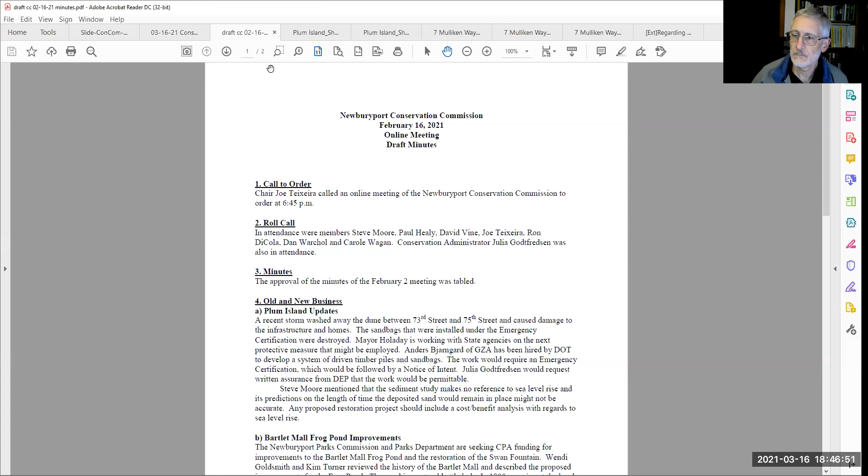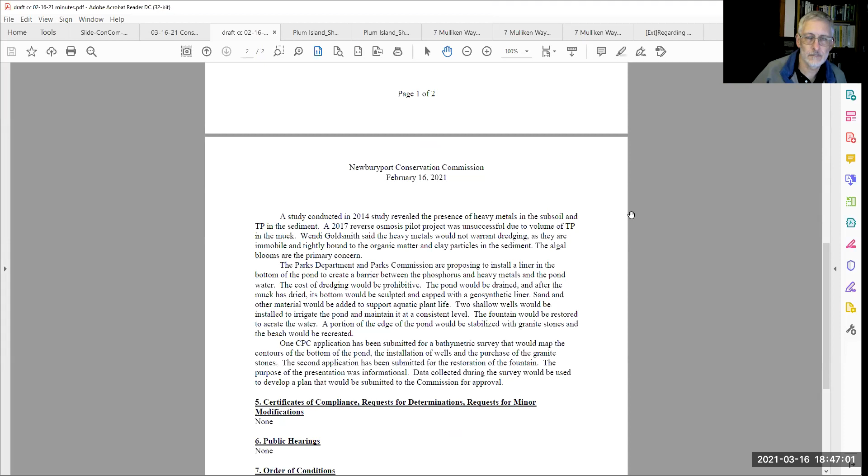All right, next item are the February 16th, 2021 meeting minutes. Any comments, changes, etc.? Get a motion? Assuming there's none. Second. All right, Paul Healy, yes. Steve Moore, yes. Dan Warchol, yes. David Vine, yes. Ron DiCola, yes. Carole Wagan, yes. And I vote yes. Maybe I'll remember to say roll call vote next time.

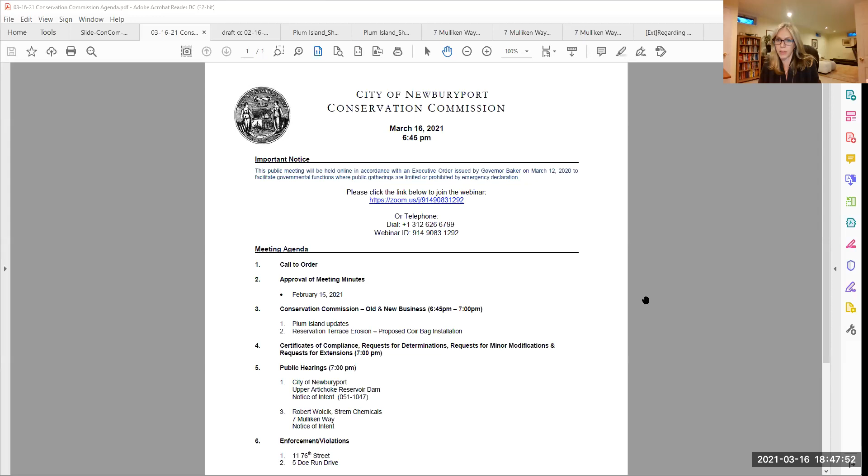All righty, next item are the, where am I looking at this, the Plum Island updates, which I think is the Reservation Terrace erosion presentation. Yes, so we have with us tonight Mayor Holaday and Anders Bjarngard from GZA, who will be available. I believe Councilor Zaid is here too. Mayor Holaday and Anders were prepared to give a short overview of the proposed project out on Reservation Terrace.

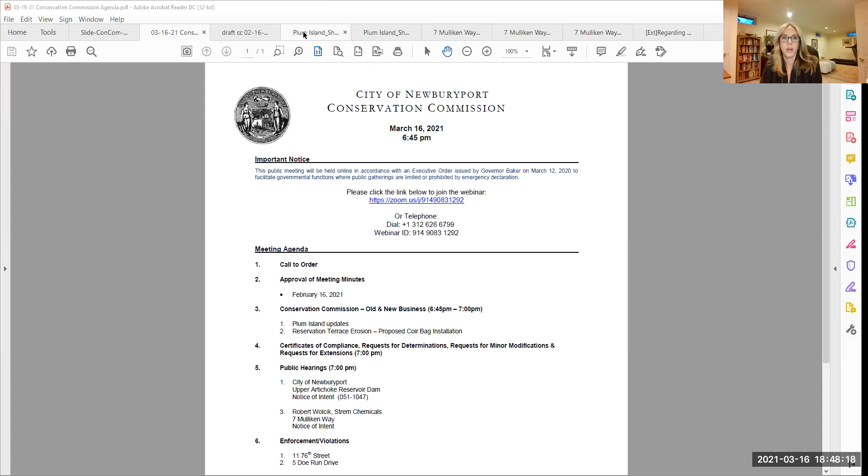So let's see, I'm going to make sure that they're unmuted, and I'll move to the draft plan. We had a meeting last week with Mayor and Anders to go over this draft plan, which some of the neighbors have already seen in a meeting we had by Zoom on Friday. But Anders, if you're here, or Mayor Holaday, do you want to give a little presentation?

Let me just start briefly. First of all, let me express my apologies for not sending out the Zoom to any members of the Conservation Commission for Friday. There's just been so many meetings and so many moving parts on this, it was an oversight on my part, and I apologize for that. The meeting was recorded so it's available to view.

We've been before you to talk about super sacks, and they did help in terms of the damage that could have occurred out on the Reservation Terrace area, but they certainly did not perform the way we had anticipated. Even though we finally got the state DCR at the table to talk about what has happened for years on this property, even though we attempted that probably 5-6 years ago when we brought legislators and the world out to walk the site when we still had a dune there. It's unfortunate we didn't move faster at that time.

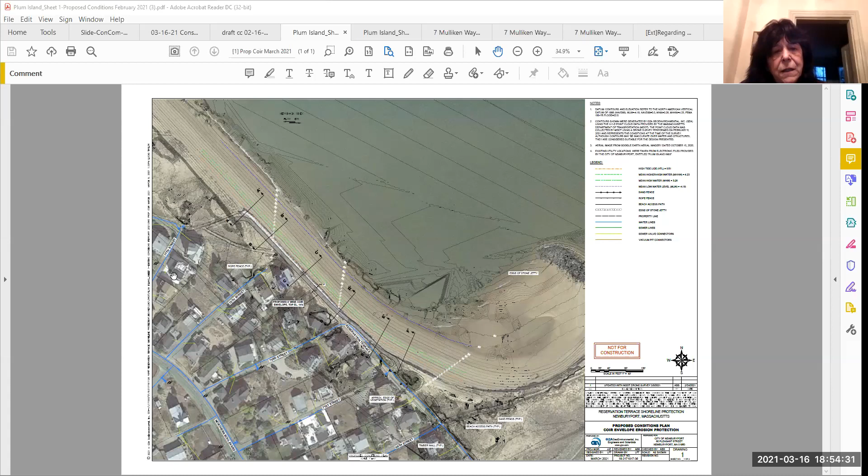So with that being said, we were actually coming today to talk about holding the emergency cert for us to move forward. But because we need the MEPA review, there is time to submit a notice of intent, and GZA is going to file that with you also, so that you will have a chance to review that at the same time while the MEPA process is occurring.

So that's sort of a quick update on where we were and how we got to where we are today. They really did have a lot of damage after the February 1st storm. No question about it.

It upended some of the wall, which DPS has reset, but it's the homes there and the infrastructure and the road are really, really at risk.

I don't know if you've had a chance, some of you, to go out and walk the site, but it is pretty amazing and pretty critical, the situation that we are in right there.

So I'm going to turn it over to Anders, who is going to walk you through this plan and answer your questions. So Anders, take it away.

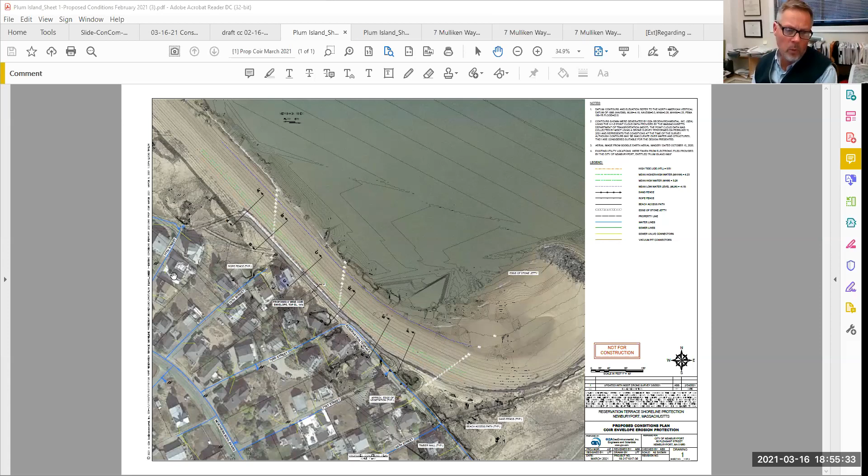Okay, thank you, Mayor. Good evening, everyone. Feel free to interrupt with questions anytime. I'll try to give you a brief overview of what the proposal is here.

And basically, the state had suggested that we look at a similar situation to that which was used down in Sandwich.

The conditions down there are comparable in terms of wave energy, though there are some differences. We were asked to work out the details to make this approach work at Reservation Terrace. That was our mission, and it's understood that this is a temporary effort that will help reduce damage associated with storms and high tides and wave action until the Corps' dredging project and on-beach nourishment project takes place, which is currently scheduled for the fall.

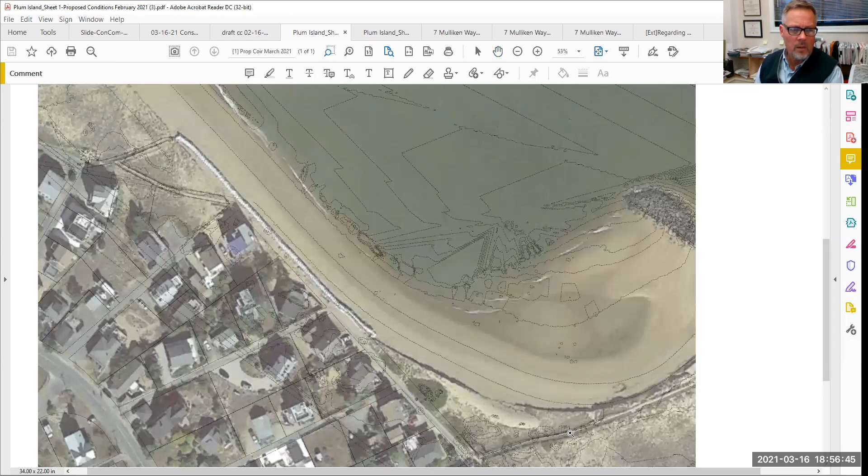Let me explain the limits here. There's a gray line that basically follows the former sandbag barrier. It goes a little bit past it on the southeast end, down by sections E and F. What we're doing is tying into the higher remnant dunes there and terminating the barrier at those locations at the north. So the overall length is about 510 feet.

One of the things here, we're using contours that were generated from Mass DOT's drone flyover. So you see some funky lines over the water - that's because they're getting reflection, and also some funky lines from structures. But the topo on the beach is good, so that's what we're using.

That topo indicated that we had lost, no surprise, some additional beach since the last time we surveyed out there last summer. So please note these cross sections here, A through F.

I'm going to go to the profile sheet now and just show you what that looks like in our proposed design. So from top to bottom, you have cross sections A through F, and A and F are basically where they tie into the existing dunes. So the majority of the installation is represented by these sections in the middle, sections B through E.

What we've done here is we've created a barrier that consists of 4 to 5 coir envelopes. The coir envelopes themselves - most of you are familiar with them - are basically sand-filled biodegradable fabric. There's an inner layer of jute, and for this installation we've got 4 layers of the coir fiber, the coconut fiber. That's one more than Sumco usually uses, just to give them a little bit more durability. Those are typically filled in place when you're placing them below grade.

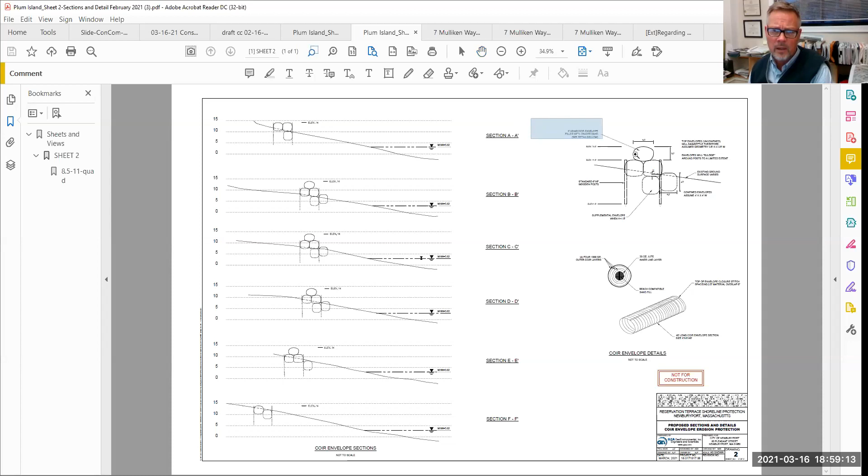In the upper right-hand corner, you can see a slight blow up of the installation. That dashed line that slants from left to right, that's existing grade. So everything that's shown below existing grade is dashed. These envelopes line the excavation and then they're backfilled with sand.

Sumco went out there and took a look at it. They feel that there's plenty of excess sand stockpiled along Reservation Terrace to fill these bags. However, the plant has already provided us with a unit cost to be used for imported sand if that's needed.

We're trying to hold this elevation of 14 at the top, and that's maybe not as high as we would like for overtopping protection. But to go higher with the way the beach is lowered right now would basically take another row and another pyramid - you'd be looking at 3 more envelopes at a minimum to get up to around elevation 17. That would help a lot for overtopping, but it just expands the project to a point where you'd have to question the cost and the fact that it's a short-term measure, whether that makes sense or not.

For comparison, this is about where the super sacks ended up - about elevation 14. So the level of overtopping would be comparable to what we had with the super sacks. There will be overtopping during storms.

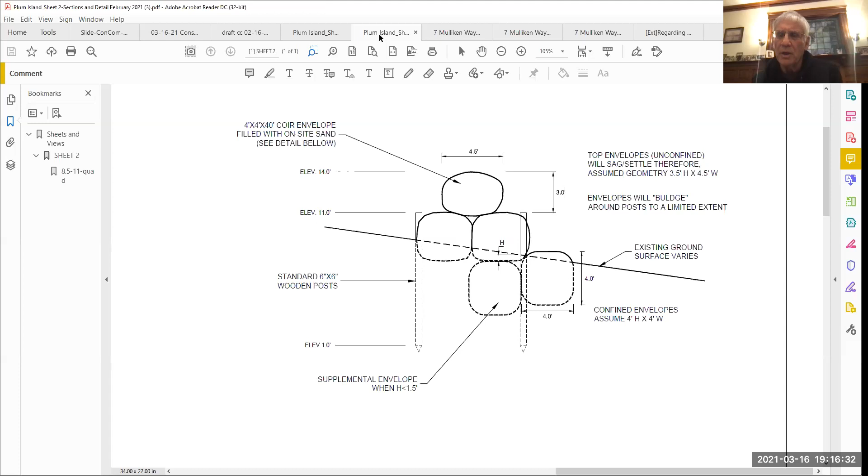Well, I guess through the MEPA filing you'll get more input on that. Even through the notice of intent process, we'll be getting some input on some of those things, I think.

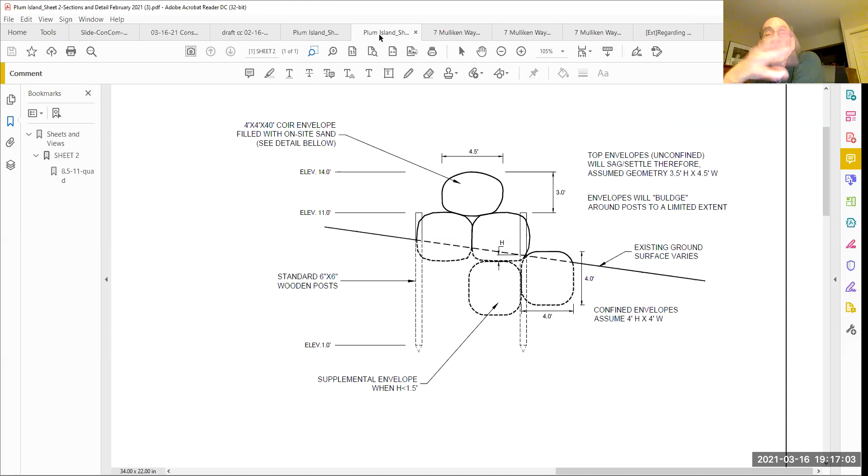I had a question. I was wondering, in case the dredging project does get held up for much longer than we expected, is there any backup plan to this coir bag thing, so that it could be increased upon to get us through next winter?

Well, I think that's definitely a conversation that needs to happen with DCR in the event the Army Corps dredging project is delayed. There is tremendous effort and support on the part of the state and our legislators working diligently to move this forward in terms of the permitting process. So I'm hoping, but again, you just don't know. It was a bid protest last time that delayed the project a year, and I'm hoping that doesn't happen this time.

But I just meant in case the worst did happen. We go back to DCR, Paul, for design work. I think we go back to DCR and Anders and say, okay, you need to replace a couple of these coir bags to get us through, and we just add more.

With a little help from Mother Nature, if she takes it easy on us, these could survive. In Sandwich, there's a little confusion about how well they performed down there, but they hung in there pretty well for 3 to 4 years. So depending on what gets thrown at this thing, it could make it.

Well, there were some coir bags installed down in Newbury a number of years ago. I don't know how long they lasted. They're still there. They've taken a little bit of a toll, but they're still there. They've been there quite a while. And we look at those off of Dr. Hermani's house, remember?

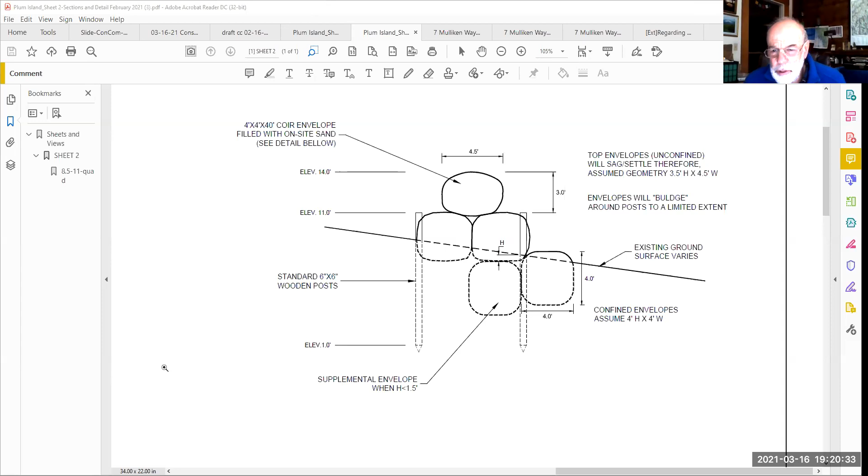Is there one other question about the posts? Do you think they're buried deep enough if we get scour? I do.

If it were a permanent installation, I might take them deeper, but I think it's appropriate for this. I'll be honest, we didn't do our typical engineering calculations looking at the force on them, it's really not conducive to that kind of quantitative design. It's more of a judgment thing. I will say that we took them 2 feet deeper than Sumco was initially thinking. So I think we're okay there.

How are they installed, Anders? They're driven down. In Sandwich, I believe they used a bucket on a skid steer, but in this case, because we're going a little bit deeper, they're going to use some type of a post driver. I'm not familiar with the piece of equipment exactly.

And will that be from the beach side, or will they be working in the dunes anywhere to do this? No, there's no dune left there except for the ends. And when they get to the ends, they can work along the barrier and back out to avoid tracking up any existing dune. They will be on the beach, but that's just intertidal and wave run-up zone at this point.

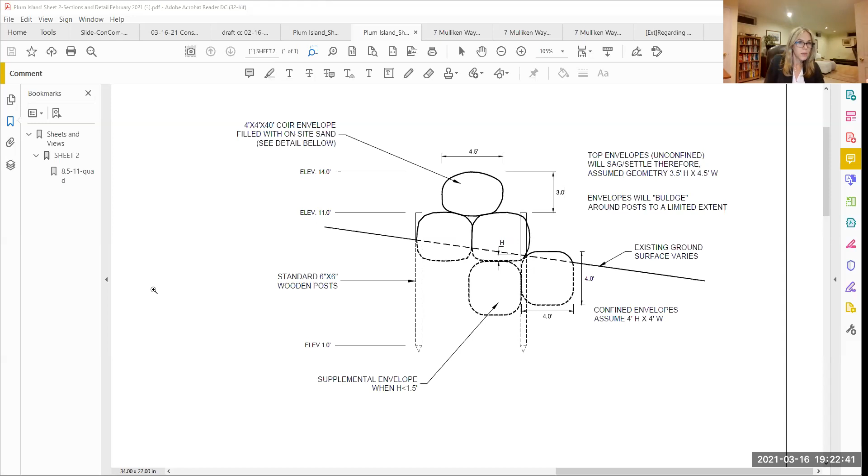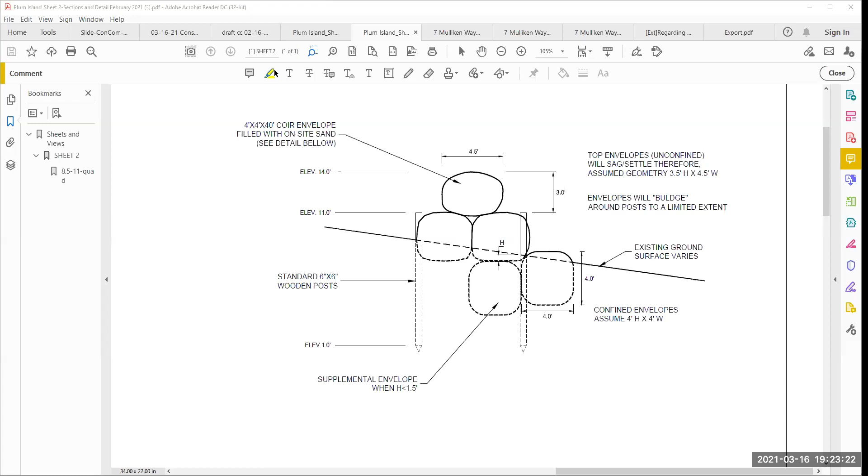I have a question. I live on 69th Street, and during the last storm, there was a barricade that was put up, right? So when that barricade stopped some water, it also caused more water to come in our direction. Down 69th Street, there was a ton of water at high tide. I am concerned that the whole water and sewer system issue is going to happen on 69th Street if you do not extend those barriers to 69th Street. To me, it's basic physics.

Yeah, I went out and took a look at that, and there is evidence clearly that it overtopped in that area between just a little bit northwest of 69th Street to 71st Street, and I have video of it coming down. And I'm about midway down 69th Street, and it actually came into my yard and flooded part of it. So that whole stream of water is coming because you're putting a structure there. When the water comes in, it's going to go to the left and to the right, and it's going to erode the berm and cause more problems further down Reservation Terrace and 69th Street. So when you're considering this project, I suggest you bring it as far as 69th Street. Otherwise, you're going to have a whole new set of problems.

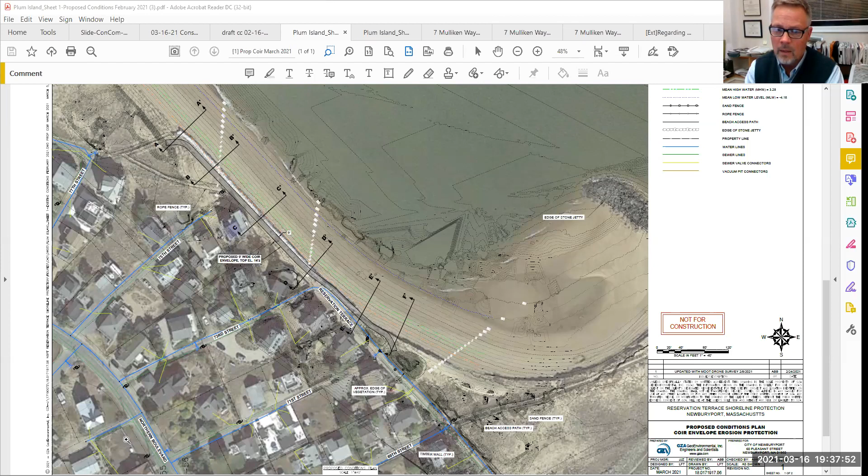I wasn't involved in the project, but I can put you in contact with the contractor. That would be great, I'd appreciate that, Anders.

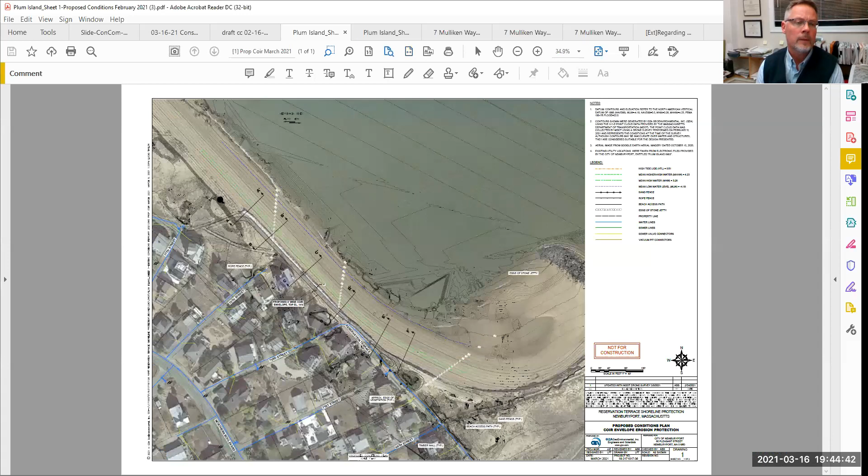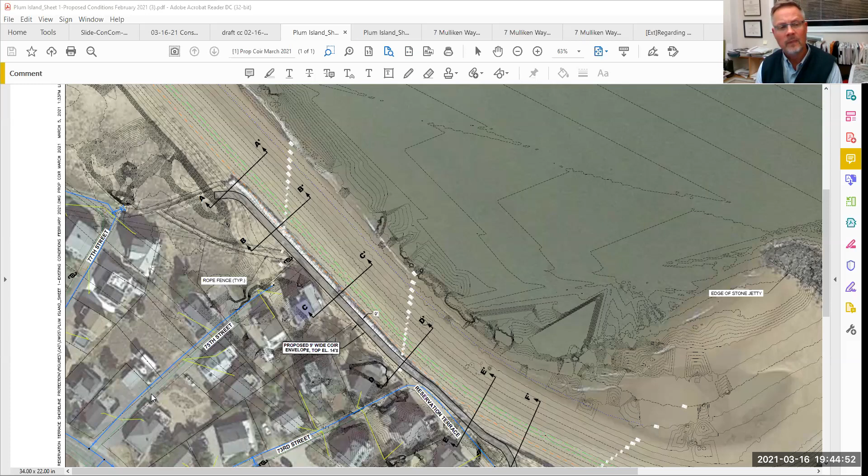Okay, the first question was how far down towards 77th Street? If you can see the plan there, it goes about a little over halfway between 75th and 77th Street and ties into an existing dune. So down where that A is? That section? Correct. Yep. And does it taper down as you reach the end? It holds its elevation at 14 feet, then kind of goes into the dune.

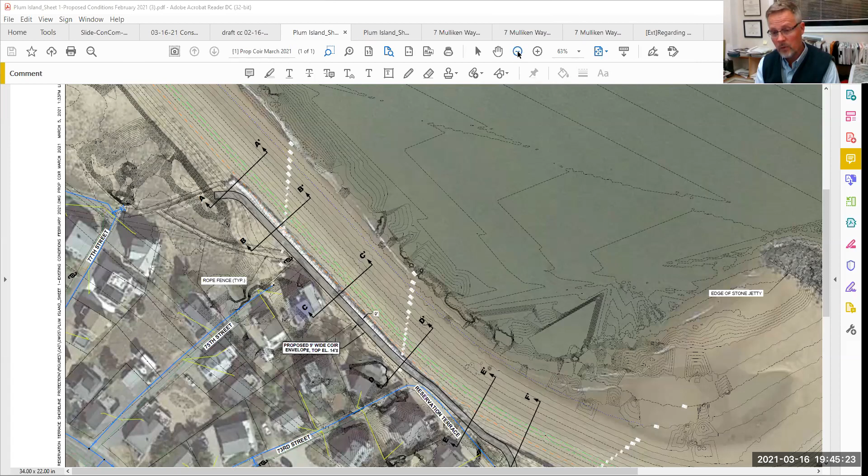And your second question, yes. So with the posts in place, if a bag tears, fails, or scours and sinks, you'd have the ability to go out there and put another one in. But if the dredging didn't happen, and I think Paul was asking that, could you add to the bags that are there and go a little higher for the winter? I'm just thinking worst case. Would you need to put larger poles in place to hold?

Yeah, you could. If you needed to, you could probably go higher. I think that's what he was asking earlier. I could be mistaken.

Okay, thank you. All right, thank you. All right. So—

You're going to make an effort to get us this by Friday, correct? Okay. And I'll discuss with the city the concept of extending the barrier starting tomorrow morning. Okay, and how long do you think that would be? Another 100, 150 feet? Yes, that's a very good estimate, I think, actually.

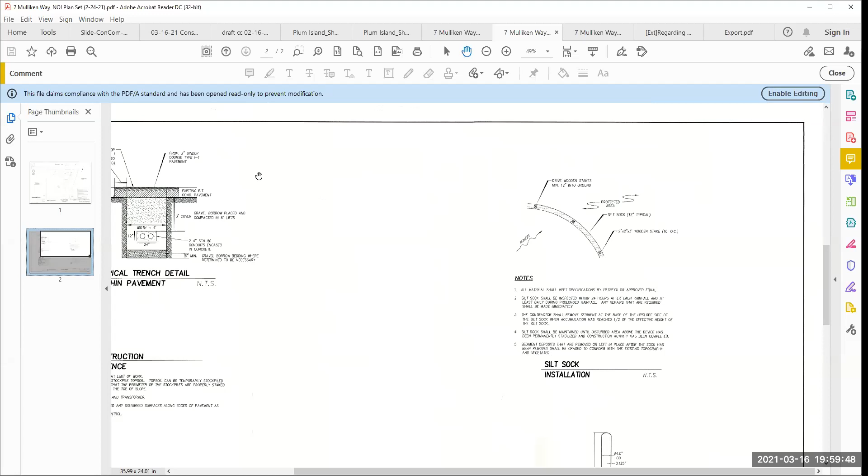Page 2 also has erosion control details and a bollard detail. On sheet 1, we identified that there was bordering vegetated wetland delineated on the site in January of this year by West Environmental. The only other resource area we found, which doesn't really exist, is the FEMA flood zone X, an area of minimal flooding. So the only real resource area here under jurisdiction is the buffer zone for the bordering vegetated wetland. With the proposed improvements, we're expecting approximately 900, I think it says 920 in the corner, square feet of temporary buffer zone impact.

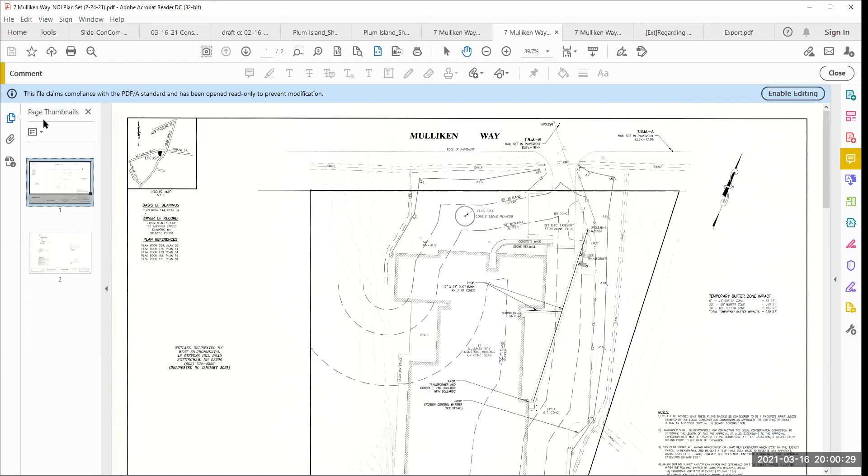Otherwise, it's a pretty straightforward project, all in previously disturbed areas, and I'd be happy to answer any questions that the commission has.

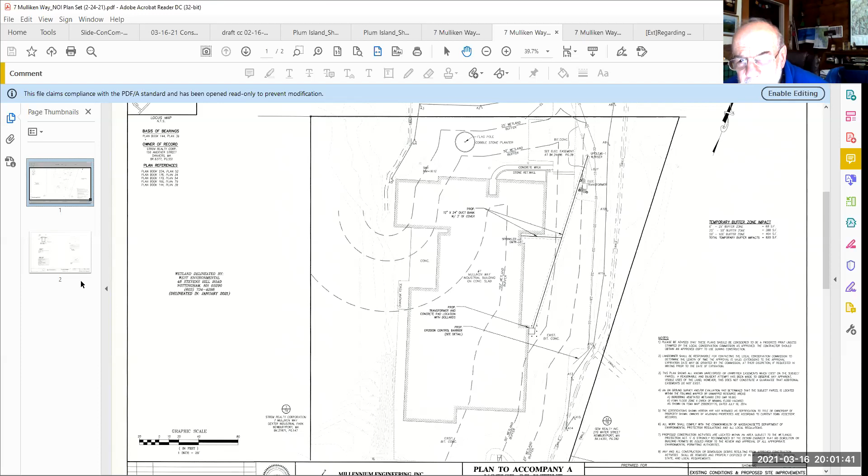Is that the part which looks to be pretty small in the 25-foot no disturb zone? Is that already disturbed? Well, it historically has been disturbed. Right now it's grass lawn, maintained as grass lawn and mowed, but this whole area we all know has had significant alterations over time. So no vegetation other than lawn grasses will need to be removed and replanted? That's correct.

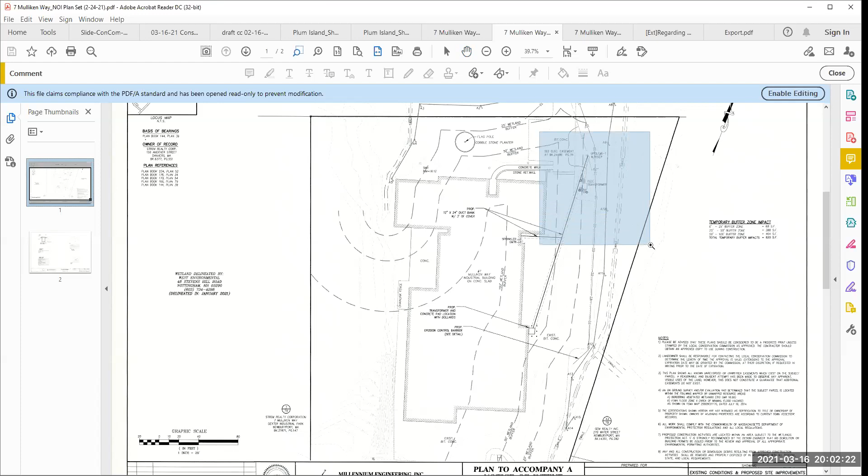If you zoom in right by where that utility pole is, you'll see there's a transformer there with a couple shrubs, and it's specifically designed to go to the side of those. And then there's the little bollard symbols there that will be installed as well.

Is there a stockpile area for the excavation? We don't have a stockpile area specifically shown on the plan. We can do that just on the sides of the trenches. This isn't a very deep trench. On the side opposite of the wetland, between the pavement and the trench itself, we're talking about a 4-foot wide trench going down about 4 feet deep, so it's not an incredibly large trench. We can do it on that side of the trench. Therefore, any erosion, there should be no erosion. This can all be done in a day. But any erosion that would occur on that side would have the actual trench itself protecting the resource, in addition to the erosion control that's between us and the resource area.

Yeah, that was going to be my question, if you're going to be doing it in one day. The portion that's in the grassed areas, I think, can be all completed in a day. The applicant is here again; he may have some more insight on how quickly the overall project will take. But I think the trench in the grassed area, where we have to concern ourselves most with destabilization, can be all done in a day.

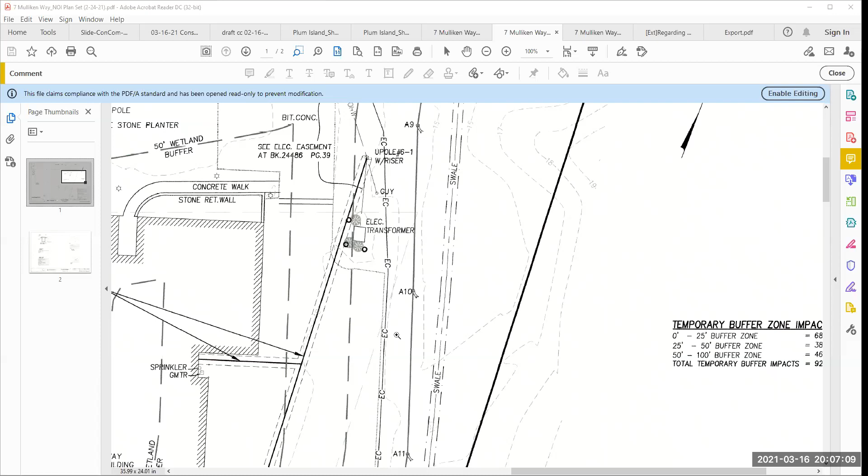I'll run them by the applicant to make sure they're comfortable with the placement, especially considering the pavement areas and the utilities in those areas. We want to make sure there's no interference, and then we'll get that over to you. Sounds good. Okay, good.

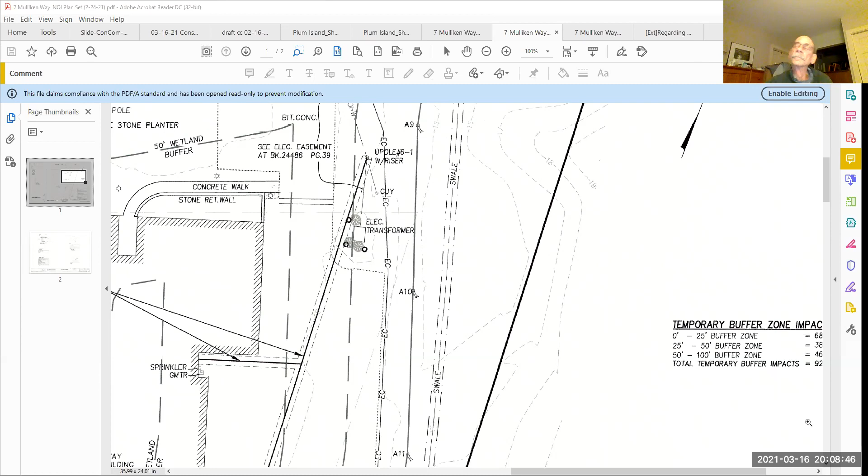Joe, do you want to just take the orders of conditions first? Yes. Vote on that? I think I'm back. Oh, there you are. Yes, you are. All right, so orders of conditions, the only one we have is 7 Mulliken Way, Robert Bolsick, Plum Chemicals.

You have anything? Oh, there we go.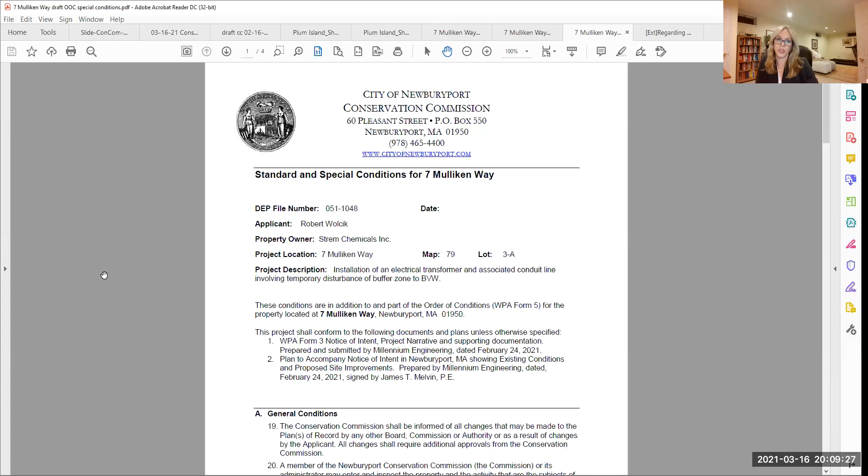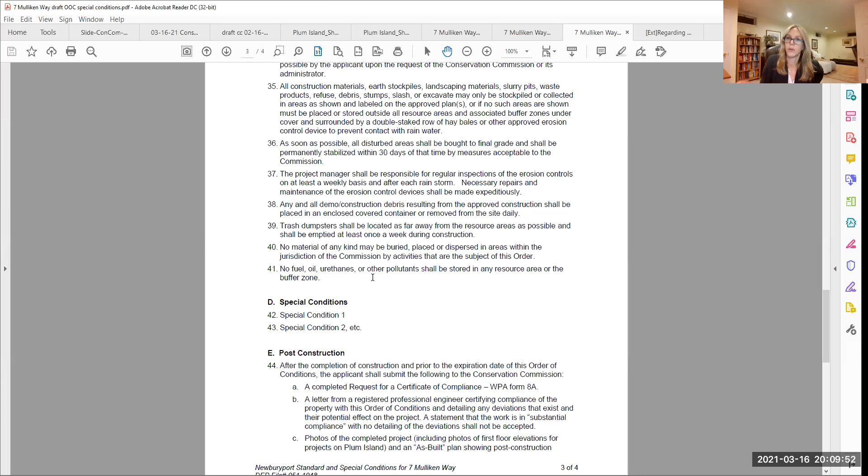I have a draft order of conditions, our boilerplate language. I didn't hear any discussion of special conditions because it was a relatively straightforward project and they had all the appropriate things shown on the plan except for the plantings, which he's going to get to me prior to issuance. So unless anyone has conditions to add, you could vote on these as is. You're going to reference bringing it back to the plan though? Yes, he has to submit a revised site plan showing proposed native plantings within the 25-foot buffer. That would be a special condition.

Anybody got anything else? Got a motion? Motion to issue an order of conditions? Second. Roll call: Paul Healy, yes. Steve Moore, yes. Dan Warshall, yes. David Vine, yes. Ron DeCola, yes. Carol Wagon, yes. And I vote yes.

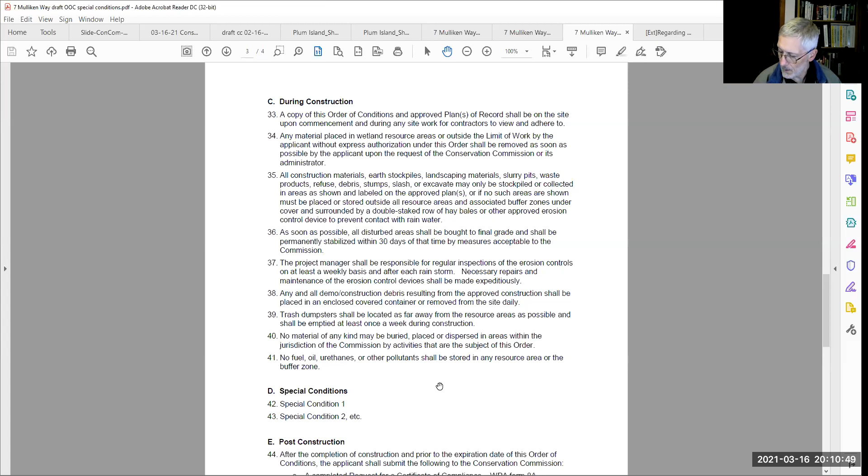Next item are enforcement violations. First one is 11 76th Street.

Did we not get anything yet? We did not get anything yet, but I did hear from Tom and he anticipates it coming in for the April 6th agenda. Okay, so he's got until Friday? He's got till Friday. We said we wouldn't let this slide. I'll send him a reminder.

Just to refresh my memory, wasn't this due at our first meeting in January? Yes. Maybe in your reminder, mention fines. Okay, I can do that. Yeah, it's an enforcement order and it's been plenty of time. Right. So yep, I can do that. Okay.

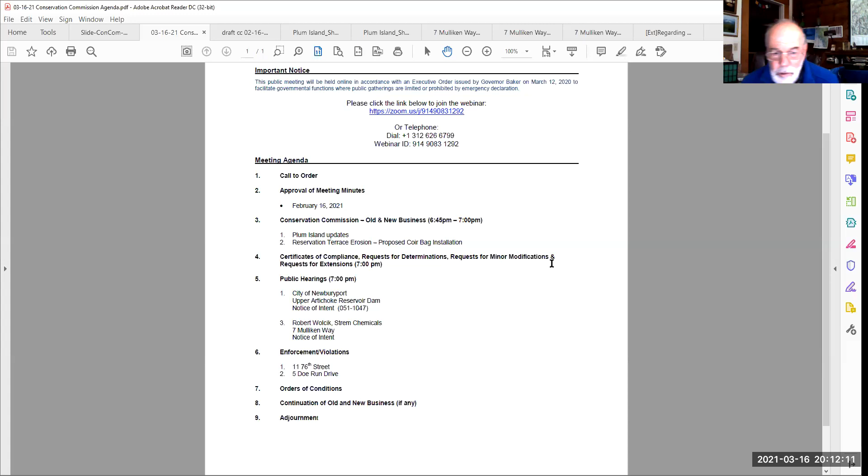Okay, let me see if I can. All right, if you are Leon Andoni, okay, I'm going to. Leon, I've just promoted you over to the panelist position, so you should be able to unmute yourself on your computer and we can discuss the issue of the wetland behind your home. Is it possible for you to unmute? Yes. Okay, great.

This enforcement order, well it's not really an enforcement order, it's a notice of violation that was sent to Mr. Andoni at 5 Doe Run Drive because neighbors indicated there was cutting of vegetation within the wetland behind the property. So I sent a letter and then a notice of violation to the Andonis. Mr. Andoni responded with an email, which I forwarded to you all, indicating that they had been removing old trash back there, parts of trampolines and things found on their property behind the fence, and tried to just clean up the area. They said they did cut some dry branches from one of the trees located in the fence, so they were essentially doing some maintenance back there, but they stopped once they realized there was concern about it.

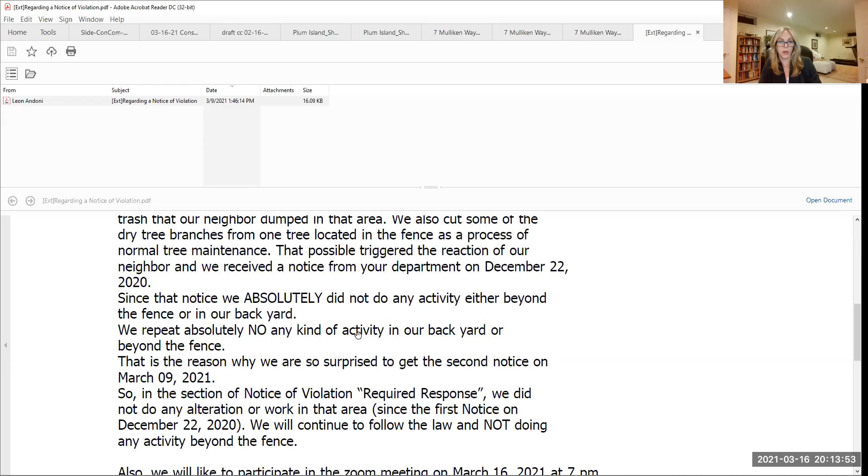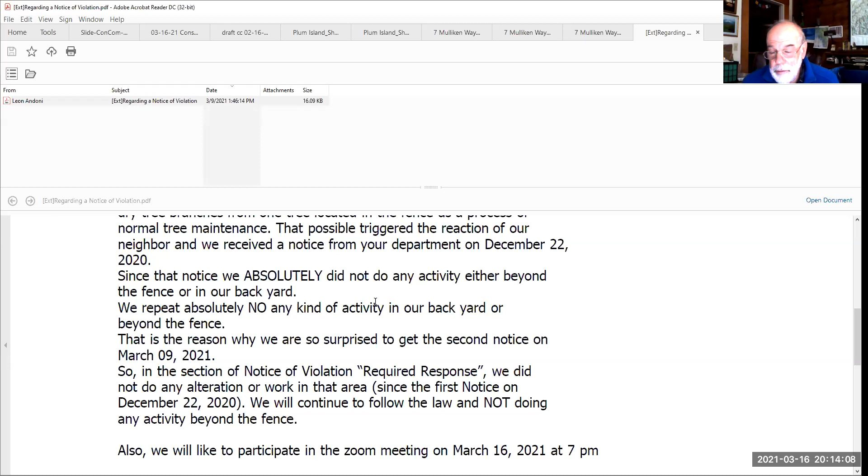So, Mr. Andoni, is there anything else you'd like to add? No, that's all. I think you certainly are allowed to go out there and remove dead vegetation. And if there's debris, metal things and remains of other structures, that's perfectly fine. But cutting any live vegetation is not permitted. And it's kind of hard this time of year to tell what's live and what's dead.

Okay, thank you. Does anybody else have any comments they want to make? No, I think as long as he's aware now that if he is going to be doing any work back there that impacts any of the wetlands or wetland vegetation, that he should talk to us first. Right, yes, that's correct.

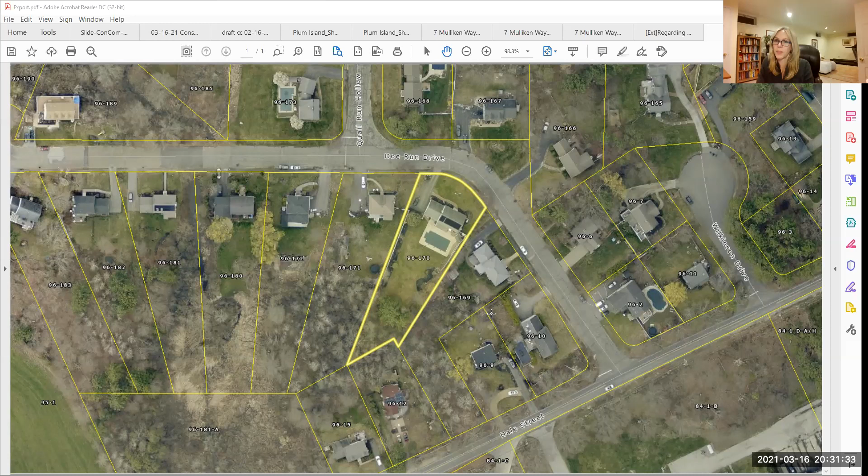Now, Steve or Julia, do we need to vote on that? The notice of violation for Doe Run Drive? We actually don't need to vote on that, Paul, because it wasn't an enforcement order. Okay, so it'll just be in the minutes that we're okay right now. Yeah, for now we're fine. That may change.